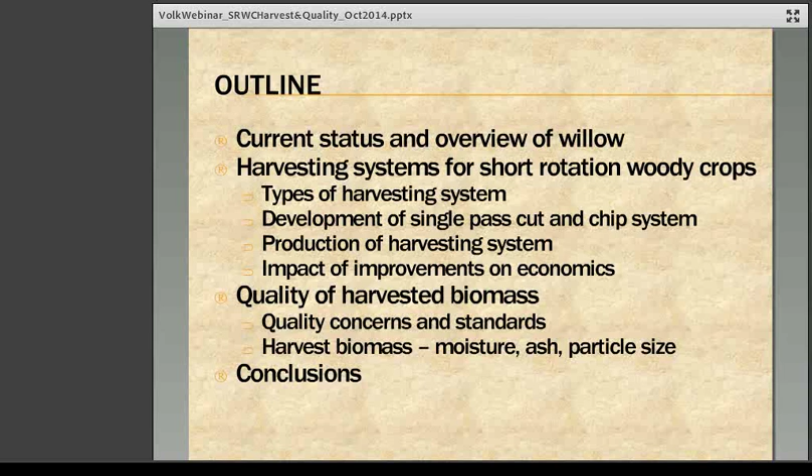Okay, so up front, just to acknowledge that funding over the last few years for work on willow harvesting and chip quality issues has come from a number of sources: Department of Energy, NYSERDA, NYSTAR, USDA, and the New Bio program as well. And there have been some key partners involved in this project over the last number of years. New Holland has been a key partner. It's really their harvesting system that we've been working with primarily over the last few years.

Greenwood Resources is out in the Pacific Northwest, and they grow hybrid poplar on about 30,000 acres out there. For some reason, Zeachem's label in the bottom left has disappeared, but they're the biorefinery that Greenwood is working with here, and we have worked with Applied Biorefinery Sciences. This is an organization here trying to develop biorefinery approaches here in the Northeast using woody biomass. Mesa Reduction and Engineering does a lot of work in the biomass realm in the Northeast and other parts of the country, particularly around pre-processing and logistics.

Okay, so just a couple of slides to sort of bring people up to speed on where things are at with willow deployment, particularly in relation to the USDA Biomass Crop Assistance Program. So this slide just shows you the 3 counties in northern New York where willow is currently deployed, and there's about 1,200 acres of willow under that program. As part of the New Bio program, there are willow trials in a number of other states and areas as well, but in terms of commercial scale-up production, this is where activity is currently focused.

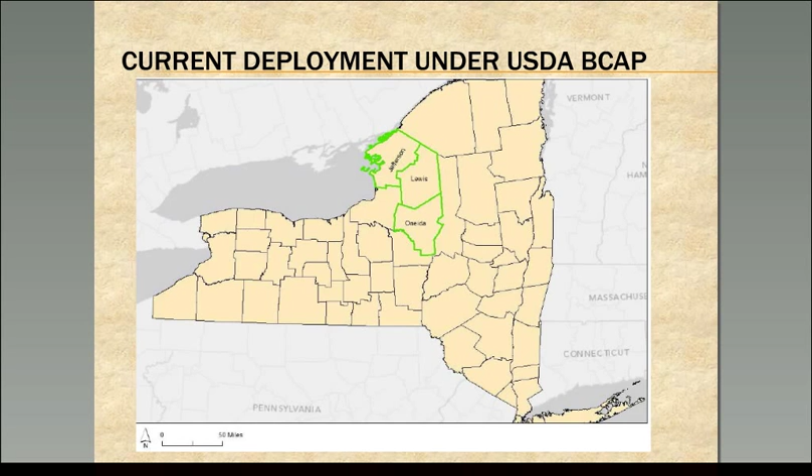This just shows you a little more detail what's going on in those counties with the green dots showing you where willow fields are located. And then the 2 outlets for this material are both owned by a company called ReEnergy. ReEnergy uses wood to produce renewable electricity and heat at these facilities. And they have signed agreements with all the landowners involved in the BCAP program to buy all the willow from these fields over the next 10 years.

So a recent development that was important and is important for both bioenergy and short rotation woody crops in this region is a long-term contract that was signed between the Defense Department and ReEnergy Black River. So just go back, that's this facility here, except for the arrow's not working. Oh, there it is. So this facility here, which is on the base, Fort Drum, they've just signed a 20-year agreement to provide renewable energy here to the Army

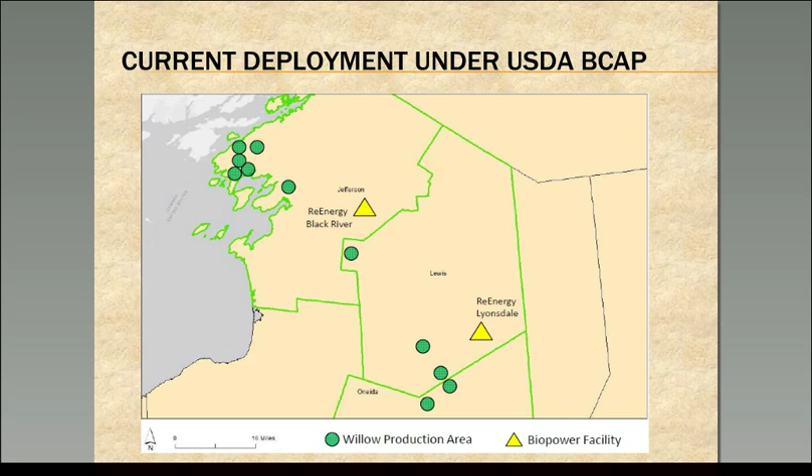in a contract arrangement. So that will provide some degree of certainty for the bioenergy market here in northern New York, and hopefully provide some opportunities to grow the bioenergy and short rotation woody crops market here in this region. So this is the largest renewable energy contract that the Army has signed to date, and they have a fairly aggressive program to get a significant portion of their power and energy supply from renewables in the near future.

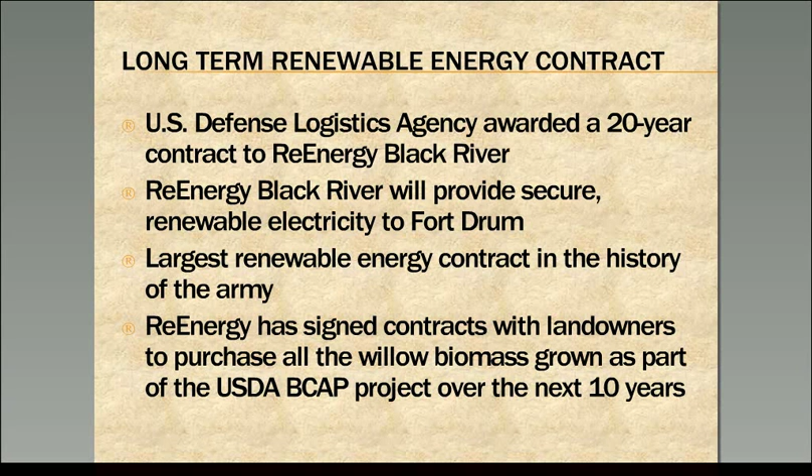Okay, so just to focus in on willow now a little more, and just to remind people, many people on here are probably familiar with this cropping cycle, but just to go over it again so we understand how the system is working. This is how the system generally works. We start with site preparation on open agricultural land. It's prepared and then planted using unrooted dormant cuttings.

Typically after the first year, it's coppiced or cut back. It sprouts back after that establishment year after being coppiced and grows back fairly rapidly, right? And then we typically go up here to a 3 or 4 year cycle, and it's time to harvest. Harvest is typically done in the late fall or winter.

The product is coming off here and then being delivered to end users, and the crop sprouts the following spring, grows for another 3 to 4 years, and then we have 7 of these crop cycles on the green arrows, and each time we're harvesting, we're pulling off biomass and selling it to an end user.

So that's the general process that we're looking at here in terms of how willow is being grown and being managed. And then today we're going to focus really in on this harvesting piece, what's happening with harvesting and the quality of the chips that are being produced from these harvests.

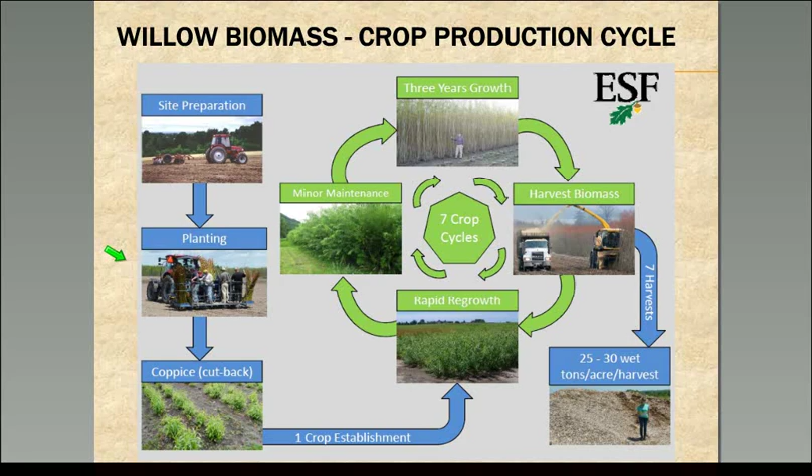So just a couple of quick notes on why the focus on harvesting has been fairly intense over a number of years now. It's really the single largest cost. So if you go back to this diagram and think about the fact that you have 7 of these cycles, which means this equipment, whatever is being used for the harvesting operation over the lifespan of this crop of 20 to 25 years, is being put on the ground 7 times, in contrast to, for example, planting, which is a one-time operation. So it's the largest single part of the final cost of willow biomass delivered to an end user.

Harvesting is also the second largest source of greenhouse gas emissions after nitrogen fertilizer additions in these systems. So it's important from a number of different perspectives, and something that requires attention and focus in order to make improvements on it.

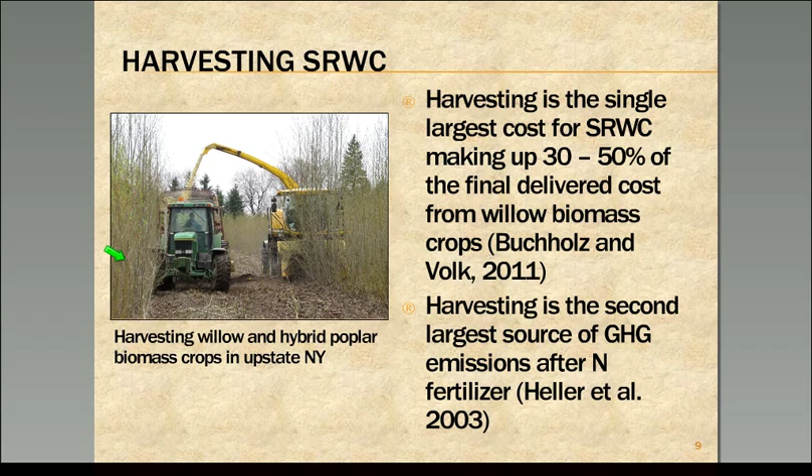There are multiple ways of approaching harvesting of short rotation woody crops, and there's been work done in other parts of North America and quite a bit of work done in Europe over the years. And so these are just some examples of other activities that are going on in relation to harvesting willow and other woody crops. There are whole stem harvesting systems.

So in the top right you can see a whole stem harvester with material that is just cut off and piled and then dropped on the ground and then moved to the edge of the roadside. So these pieces of equipment can generally handle larger stems. You've got some potential for natural drying of the material. However, you have additional handling steps involved in these kinds of processes.

Down at the bottom right, there's other folks that have worked on, instead of handling loose stems, which with willow can be a bit of a problem because of the way the material falls and can become intertwined, baling or bundling systems. So down on the bottom is a bio-baler that was developed by folks up in Quebec and has been used in a number of different locations. There's also a bundling machine that was developed in Europe.

Again, potential for natural drying, generally a little lower productivity, some benefits in terms of using these at smaller scale operations, and then just the realization that you have an extra handling step if you're going to get this material into a form that's usable by producers or end users of your product.

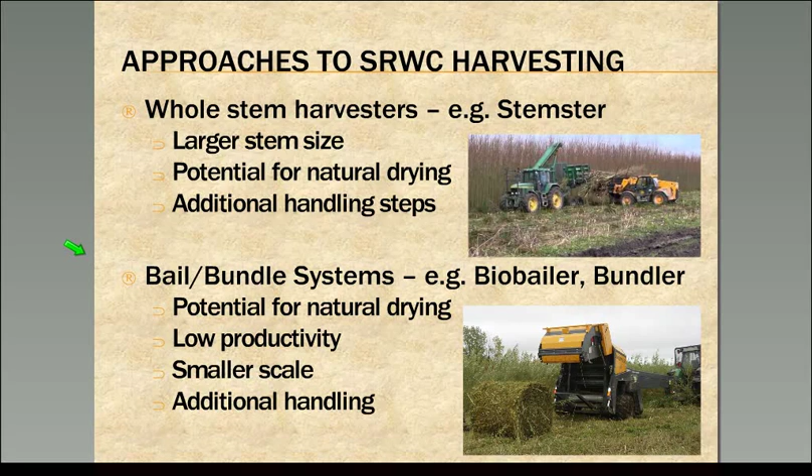NewBio will next year have one of these tractor-mounted corn chopper systems here and available for use, so that will provide some benefit for smaller scale trials in particular, and also help us to get a better handle on what costs are associated with running those operations.

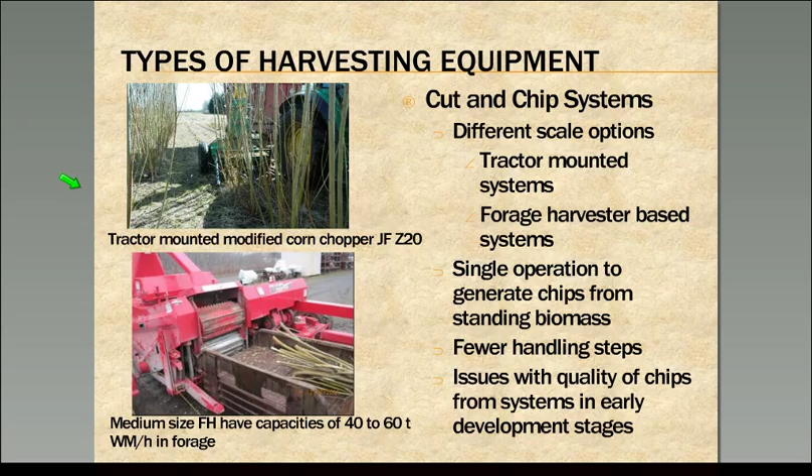So just to have a brief summary of what's gone on here in the U.S. in terms of trying to develop willow harvesters over the last number of years. Here is the type of system that was being looked at early on, and there were a number of challenges over these sort of development periods. You can see the quality of this material and these photos that came out of some of these early harvesters was not at all acceptable.

So in these pictures here, you can see that this is not material that most end users are going to be excited about getting at their facility. It's going to cause lots of problems with handling and delivery. There were problems with equipment reliability, high costs, and the size of stems that could be cut and processed with some of this early equipment were also issues.

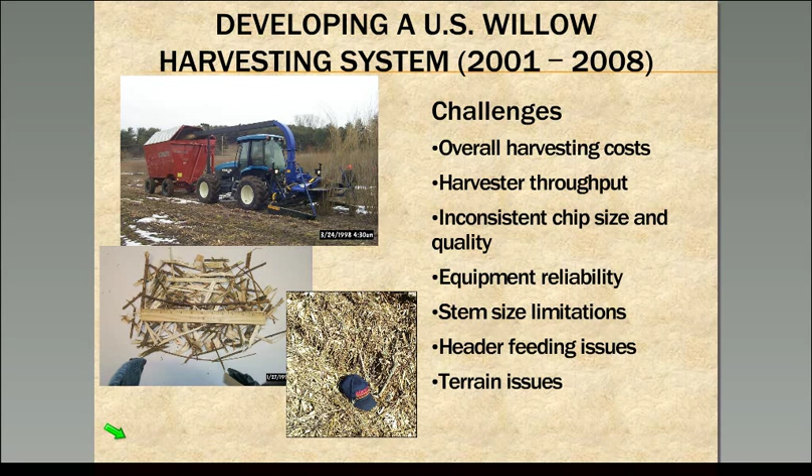So that machine is the same as this one. It's called a bender. This is a tractor-mounted machine that we worked with for a number of years. It came out of Europe, out of Sweden, and some companies that were developing it there. We worked with Cornell University for a number of years to try and get that to function effectively here, and it never really did, never was reliable or produced consistent quality chips.

The next step was actually New Holland contacted us and wanted to see if their forage chopper could operate in willow, and they brought a modified corn head up, and we put that through some willow and thoroughly ruined it within a few acres, but it did show the folks at New Holland that their forage chopper with no modifications on the inside could take in willow and produce a nice product.

The next stage in the process was to adapt this very heavy duty header from a design in the UK. It was modified and redesigned slightly to fit on a New Holland machine. And that worked for a number of years. It had some issues with feeding, but was a significant improvement.

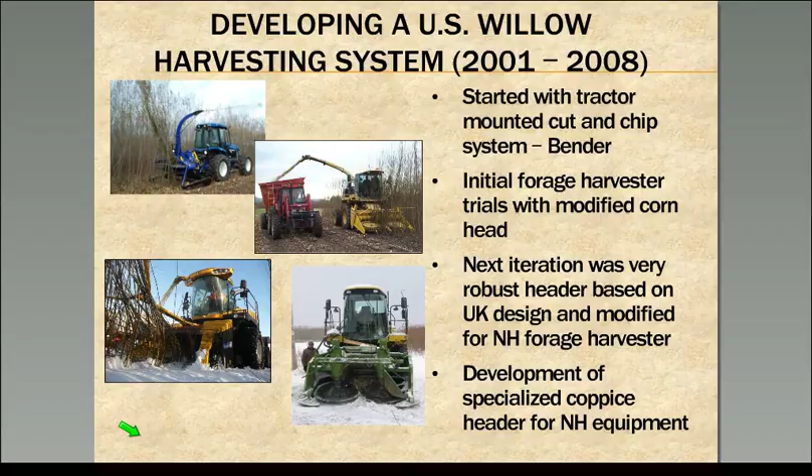Okay, so this is just to give you a little bit of idea about the harvesting equipment used in this project. Again, it's based on the New Holland forage choppers. So this back part of the machine, the forage chopper behind the header, there's nothing dramatically changed in this. There are some extra guards you want to put around the window, and they put a guard underneath so that lines and things don't get caught when you're cutting woody crops. But other than that, there's no significant changes to this machine.

This header then fits on the front, and you can interchange and use your forage harvester for other operations, as you can see in the bottom, for either corn or grass or other operations like that. So one of the advantages of this kind of a system is that farmers can use it to harvest more traditional crops, change the head, and then harvest woody crops after the typical crop harvesting season is over.

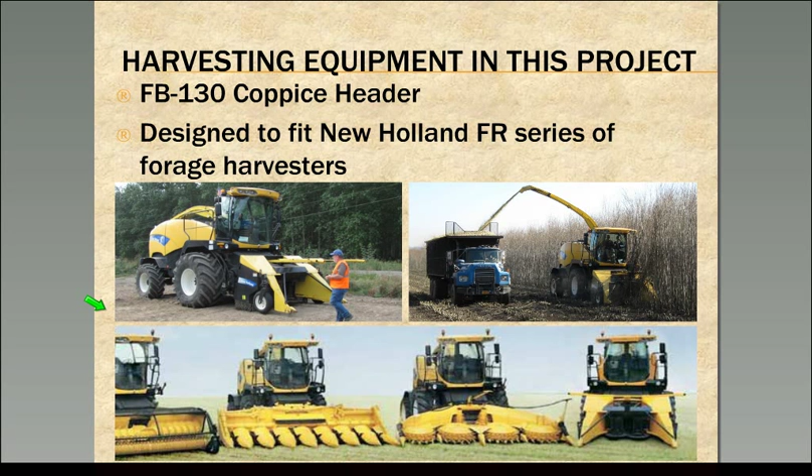Over a number of years, we worked in conjunction with New Holland on the development of this machine. New Holland really did the work on designing the cutting head and any other modifications to the harvesting system per se. There was lots of work done on components. This is a picture that shows the front with the saw blades at the front into the feed rollers here. They did work on these vertical rollers, how to collect material, how to get it to move in smoothly into the harvester.

There was a fair amount of work done on this push bar that sits out in front of the machine. It's the first thing that comes in contact with the willow, and the angle of that and the strength of that is important. A lot of work on saw blades in terms of what is the optimum type of saw blade for cutting effectively and efficiently without having huge maintenance costs incurred in the process.

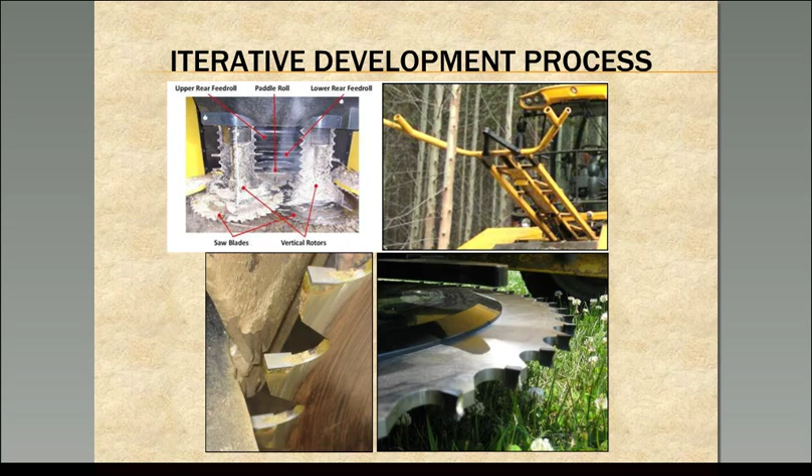So what really happened here is New Holland folks would make modifications and improvements. We'd go out in the field and do testing, and we do monitoring around those operations. They'd learn lessons and go back and make changes and improvements, and it was an iterative process over a number of years to get to the stage of where things are at now. So we're going to show you a short little harvesting video here to give you an idea of what this looks like when it's running in the field.

So this was part of harvesting operations that occurred in 2012 and 2013 in central New York. So this is a shot from inside the cab.

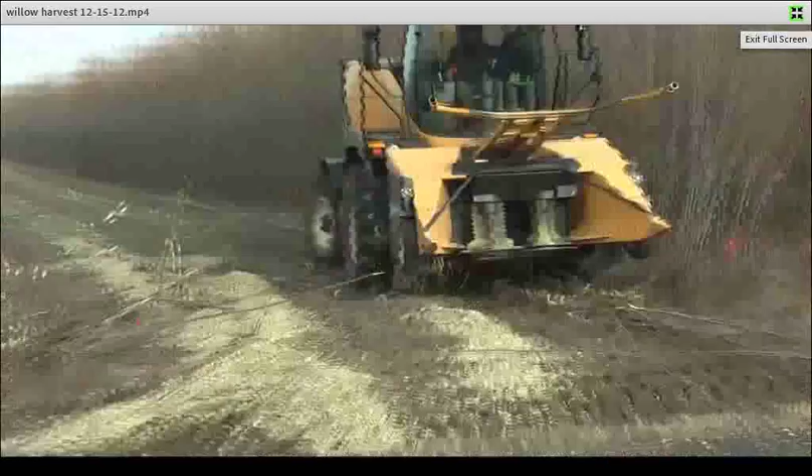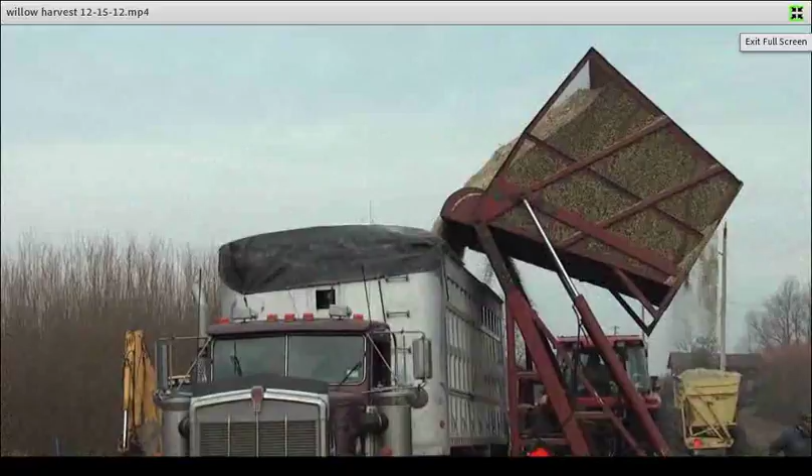So again, this is a single pass cut and chip system, so it's cutting off the willow. The stems are fed through the forage harvester, and it blows out chips into a collection wagon. We looked at a number of different collection wagons in this process. The one going across the screen is actually used in green bean harvest in upstate New York, a self-propelled wagon.

This red wagon that you've seen in a couple of shots is actually a sugarcane wagon, so it was brought up from down south. It fits well into the spacing that we have for willow, and the other advantage is that it lifts higher than most of the forage dump wagons that are used in the dairy industry around here, and so you can dump directly into trucks such as you can see here. Okay, so that just gives you a little idea of the operation of the machine.

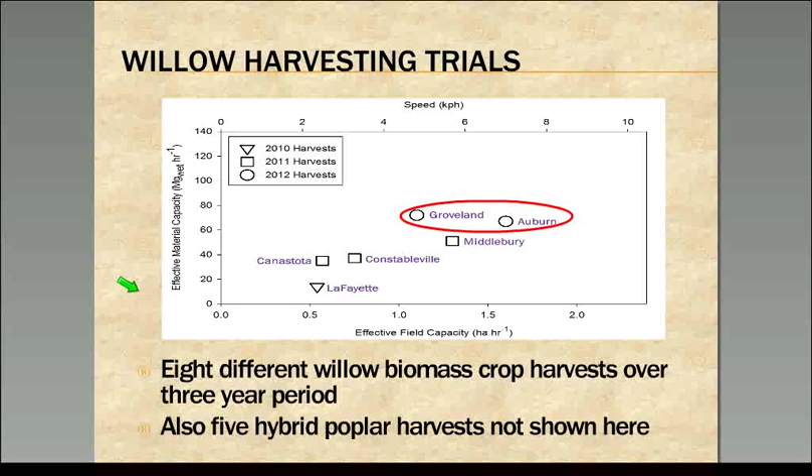When we talk about economics, we set up this base case, and this was a trial down here at Lafayette that was done in 2010. So when we come back to the economics and we talk about the base case, we use data that was collected from the harvesting back here in 2010 to indicate what the costs were associated with the machine at that point in time, and then to look at improvements that occurred over the 3-year period of this project. So let's move on, and we'll talk about what results were found from these Groveland and Auburn harvests.

So just to give you a snapshot of these sites, there was a collection of fields here and one smaller one, and this material was delivered over here into Auburn onto a hard pad. Here at Groveland, the fields were here, another set of fields here, and then they were delivered down here to a nearby farm and put into short-term storage. Again, about 150 acres were harvested in 2012 and 2013.

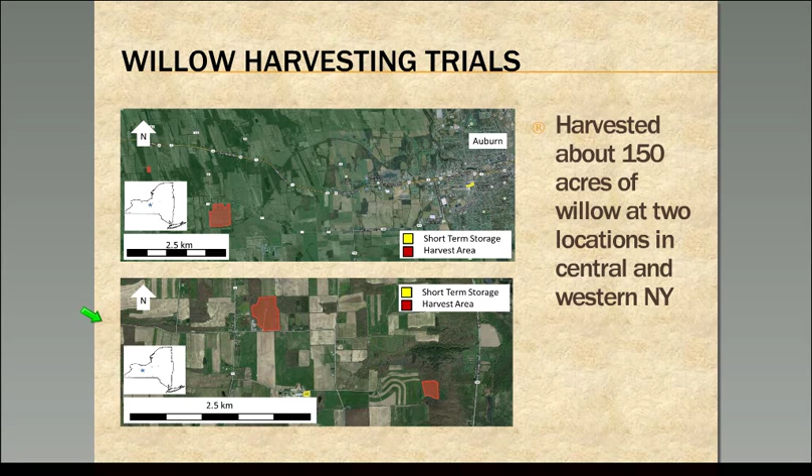So I don't want to get into all the details of this, but there was a lot of data collected, well over 1 million GPS data points. We had GPS equipment on the harvester and on the tractors that were hauling wagons or trucks that were collecting chips, and so we put all that information together, and Mark did an incredible job of processing all that information and making sense out of it, and I'll show you summary results from lots and lots of work to get that done.

But again, the main things we're looking at here are ground speed, that's called effective field capacity, so how many hectares per hour. We have records now of standing biomass, wet tons per hectare, and then we have effective material capacity. You can think of that as throughput, how many megagrams wet per hour are coming out of the harvester. As a result of the work that was done and the monitoring that was done, we also have information on turn times and delay times and other information like that that we won't necessarily get into today.

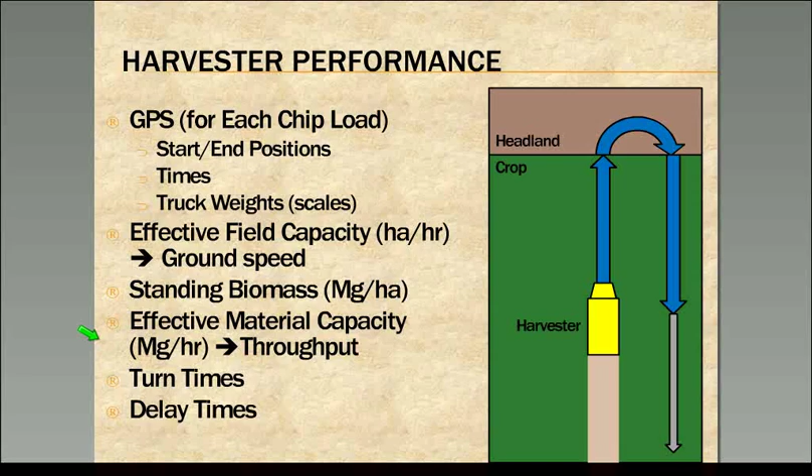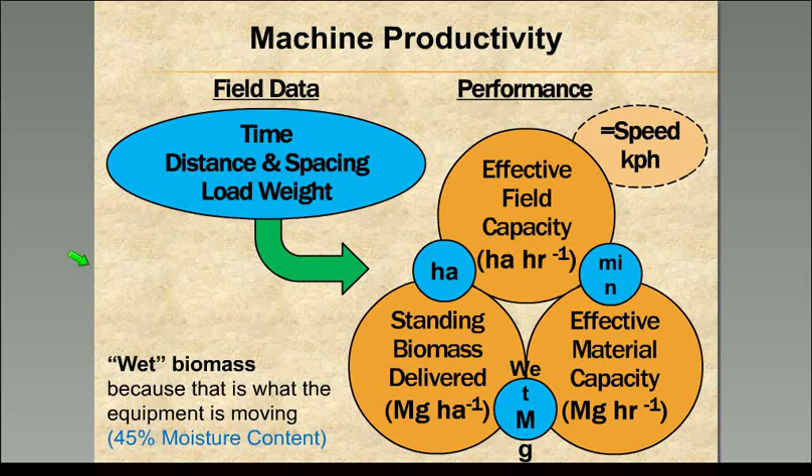So again, these different components are linked, right? Effective field capacity, hectares per hour, standing biomass, and effective material capacity are related to one another, and all information that we collected and processed out of these harvesting operations or trials. Okay, so we could spend a lot of time talking about that process, but really this is the key summary graph. So what do we have here?

We have standing biomass in terms of what was delivered. So this standing biomass number does reflect what came off the field and what was delivered to the scales at short-term storage. Again, we're doing this in wet tons because that's the way it's coming off the field, so wet tons per hectare. And on the y-axis, we have effective material capacity or throughput. How many wet tons of biomass are coming out of the machine per hour?

And what we really found is that there's two different patterns in this relationship. When you're below about 45 wet tons per hectare, there's a relationship between standing biomass and throughput. And so this is really limited by the speed that the equipment can go across the field. And so you end up developing this relationship.

When you get above this about 45 wet tons per hectare mark, then the output of the harvester actually begins to level off or have a much smaller increase as the standing biomass increases. And so what you're really starting to reach is the capacity of the machine, and it becomes more limited by the vegetation and the amount of biomass that you actually have standing on the site.

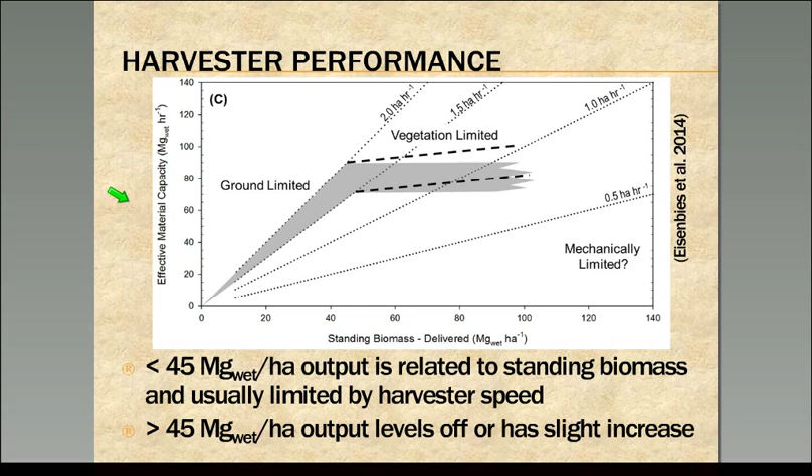Okay, so this is from 150 acres of willow harvest, right? So this graph in the bottom is the one I just showed you in more detail on the previous slide. One of the things that is clear is that this slope can change. So this part of the graph here can flex up and down, as well as the height of where this levels off in terms of the throughput of the machine. So this part of the graph also has the potential to slide up and down.

So it's factors like the operator in the machine, the capacity of the machine, improvements to the machine, the type of ground conditions that you're dealing with that may well change the dynamics or the exact location or slopes and angles of these fields. So as more data is collected, we'll have a better idea of refining that. We've already seen some shifts in some hybrid poplar plantings where this bar here tends to be shifted a little bit to the left because of the ground conditions and the type of crop conditions they're dealing with in those harvests.

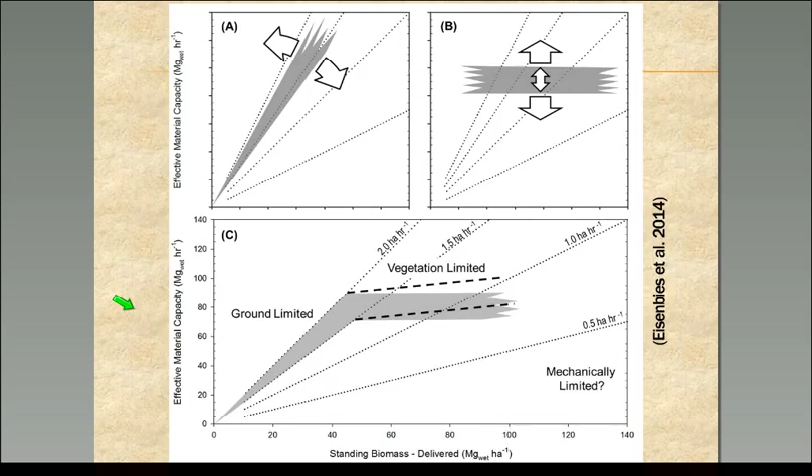We also did some work to look at the system, and as we mentioned before when we were looking at the video, there were a number of different harvesting collection vehicles that we looked at. The two that were probably the most effective were this cane wagon, and landowners are now using these for harvesting in northern New York. And on one of the fields, the conditions were dry enough that we were able to put silage trucks directly into the field.

So these are the kind of trucks that people also use when they're harvesting corn silage if ground conditions allow, and the spacing in the willow field actually allowed these trucks to go into the field for the most part, and we could collect directly into these trucks, and then those trucks could go off directly to short-term storage. So you skip a step, because if you collect in these cane wagons or some of these other wagons, you then need to unload into these silage trucks, which were taking the material to short-term storage.

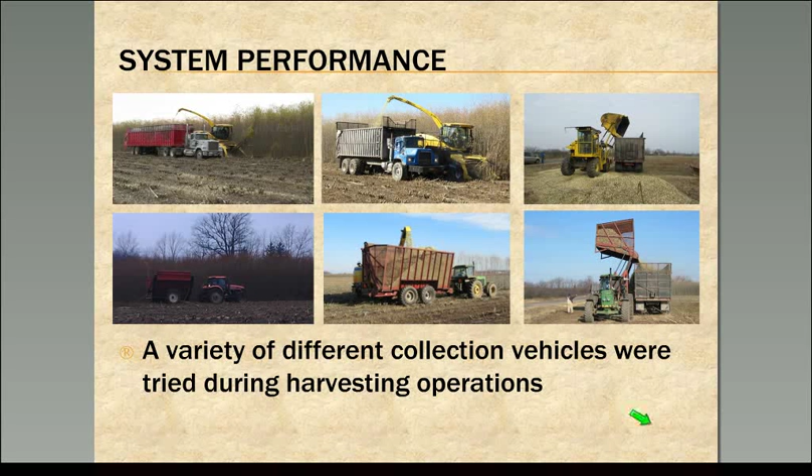And we can tell you that the headlands in these trials were wholly inadequate. 10 to 15 feet to turn around this kind of equipment at the end of a row is wholly inadequate. And I think people have learned lessons, at least the people involved in these trials have learned lessons that bigger headlands has got some real value when you get to harvesting. And then what happens when you get it to the landing and move it into vehicles and deliver it to short-term storage. Okay, so those are all the steps in the process here that we have information for.

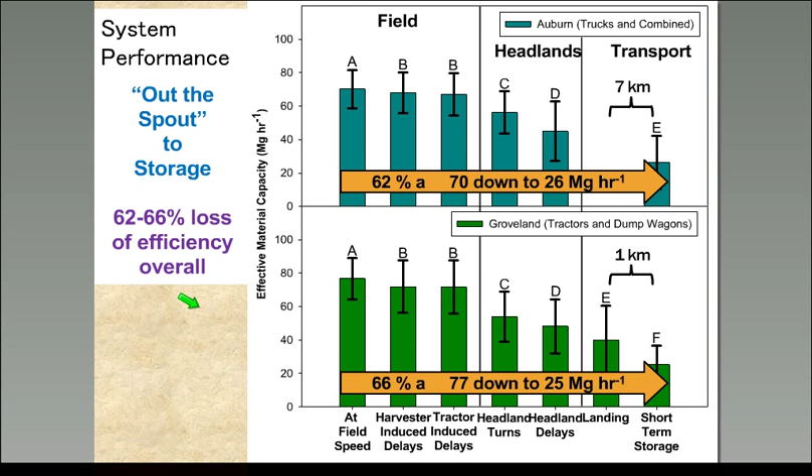Okay, so just in terms of the efficiency, when you look at what's going on here in the field, at Auburn, over 90% of the runs that were recorded with data were over 85% efficient, and in Groveland it was slightly under 90%. But generally over 85% efficient in terms of operations in the field. So not a lot of downtime associated with either the harvester or tractor-induced delays at that point in the system.

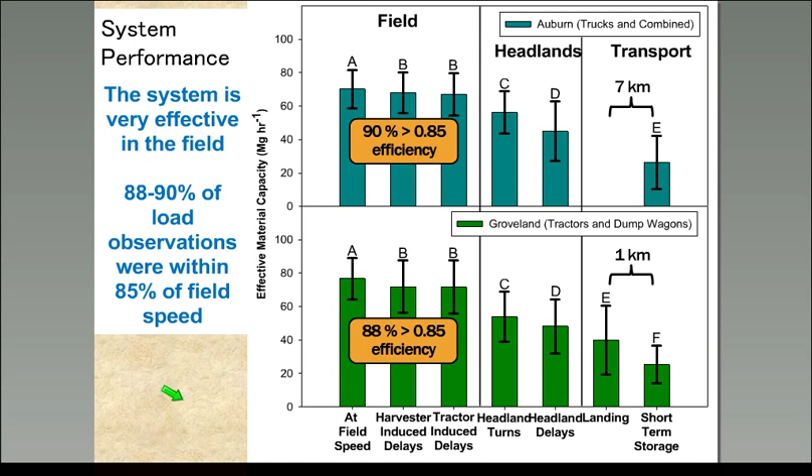When you add these other components in, very few of the runs, about 10 to 14% of the runs, had greater than 85% efficiency. So this really just to emphasize that it's these parts, including the headlands and getting the material off the field and delivered to short-term storage or an end user, is where the gains are to be made, and work needs to be done to make improvements.

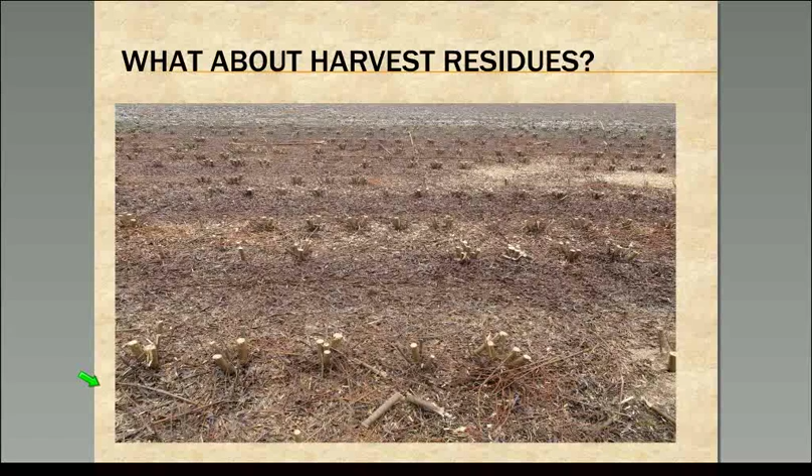Okay, so just a comment about harvest residues. People often wonder what's getting left behind, and this picture sort of captures the components. There are pieces of stem that sometimes don't get picked up by the harvester. There are collections of stems that are sometimes pulled along with the harvester and dropped in the field. There is lots of fine and small material that is also left behind. And sometimes there are pieces of stems that don't get cut off and are left on the stool, not illustrated so well here in this picture.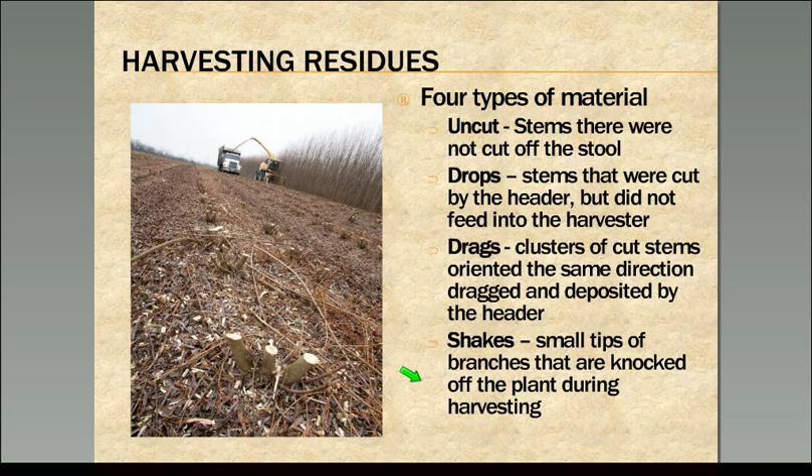So how much stuff is left behind? About 6 to 8% of the standing biomass from the data that we collected out on these harvested fields seems to be left behind, and about half of that is this shakes material that I was mentioning. So it's this small tips and fine branches of the willow that is being left behind.

And when you start looking at that material, it's probably a good idea or an acceptable idea that that material is getting left behind. It generally is harder to chip that material and get it to a consistent size, and so it often can cause some problems with handling systems. It's also got a higher nutrient content, and so leaving some of that material back behind on the field also has the potential to address some of the concerns that get expressed sometimes with nutrient removal.

So really, what are you looking at then? Maybe 3 to 4% of the standing biomass gets left behind in larger pieces of material that would otherwise be nice to be able to collect. So a relatively small amount of material being left behind in these harvesting operations.

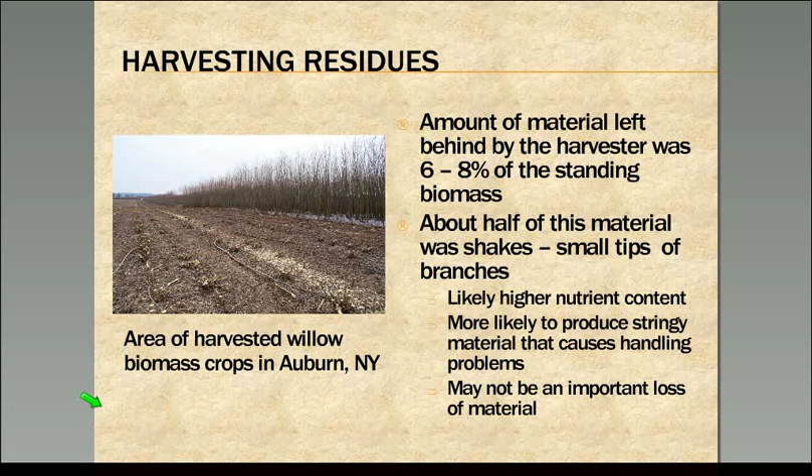Okay, so let's talk about economics for a minute in terms of this harvesting system. And again, I'm going to go back to what I mentioned before. When we were doing this work, we were required to develop this base case scenario. So in 2010, we went out and did some measurements during a willow harvesting operation. And the data that was collected at that point in time with the state of the harvester as it was and being operated is our base case scenario.

It was also a slightly different collection system than what we're using now. So it had a forage harvester. Chips went into a small dump wagon that was pulled by a tractor. That small dump wagon was then unloaded into a blower, a forage blower, and those chips were then blown into a chip trailer.

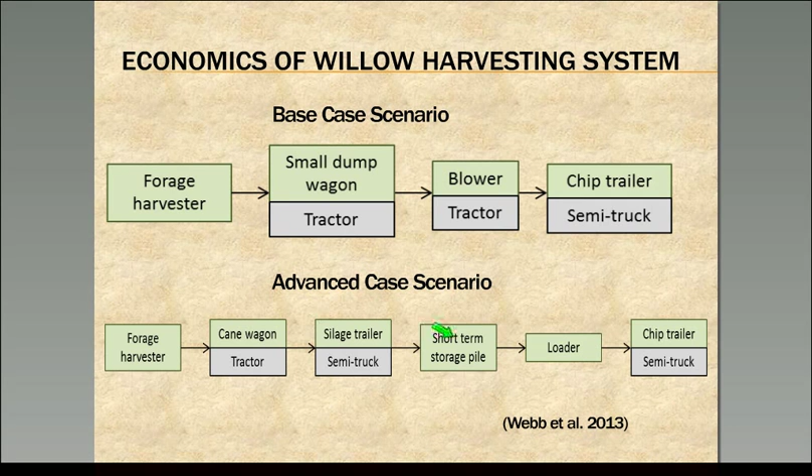The advanced case scenario is the other one that we'll look at in contrast. So this is based on the harvesting data that I've been talking about from 2012, 2013. It's got a forage harvester. It's got this cane wagon that I've shown you pulled by a tractor into a silage truck, which is delivered to short-term pile. It's then reloaded and put into a chip trailer and delivered to an end user.

Okay, so just some comments on this. We collected data in the field and then provided it to folks at Oak Ridge National Lab, and they ran it in their IBSAL model, and it was based on our 800,000 dry ton per year biorefinery operation in upstate New York.

The willow was harvested from October to early April, and so that means that about half of the year's supply, 400,000 dry tons, was coming from willow. The other half of the material was going to come from forest residues in this scenario. When they looked at land availability and where willow could be sourced, it had a radius of about 28 miles around the facility in order to reach that target of supplying 400,000 dry tons per year.

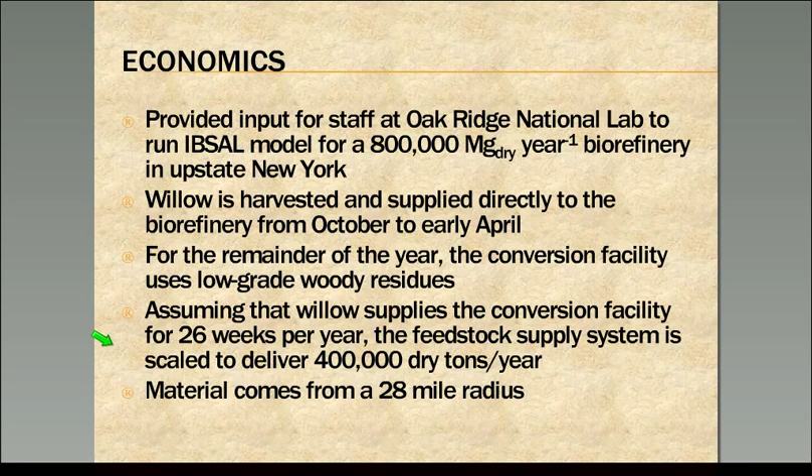Okay, just some other comments on these things. So again, this base case is based on field data that we collected in 2010. The harvester efficiency was fairly low. It was only 74% efficient, and its speed was lower than what we've had in the last couple of years, about 1.5 miles per hour. And I talked to you that this blower was being used instead of going directly into silage trucks to short-term storage.

In contrast, you can see at the advanced case, so 3 years later, considerable improvements in harvester efficiency and speed. And so these really reflect the iterative process that went on over a number of years and improvements in the harvester operation.

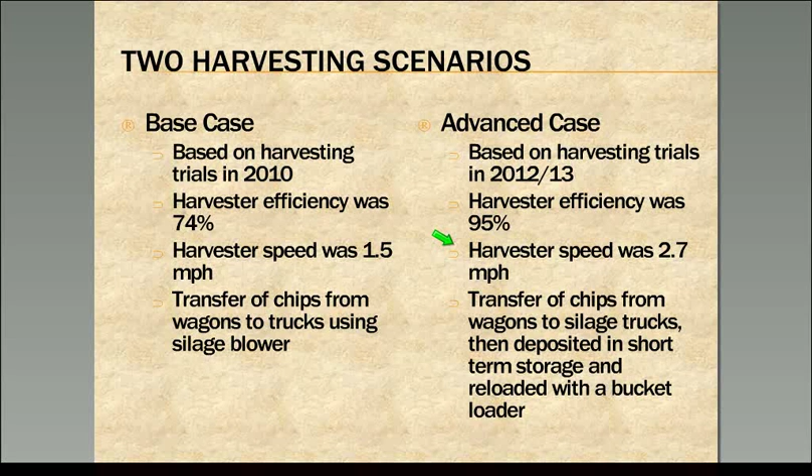Okay, so here's the results. These numbers are reported in terms of dollars per dry ton. If you just want the bottom line, here it is. In the base case scenario, costs were around $52 for the harvesting and logistics part of the system, $52 per dry ton. In the advanced case scenario, it's down around $34 per dry ton. So about a 35% reduction as the harvesting system was improved.

And you can see where the main improvements are. Had to do with the operation of the harvester, an improved operation, better efficiency, better throughput.

So that has a big impact on the costs of the harvester, and then also it has an impact on in-field transport, because if you're able to move this harvester more efficiently with less downtime, you have a lot less downtime and sitting around with collection vehicles and extra costs associated with that when things are not being productive.

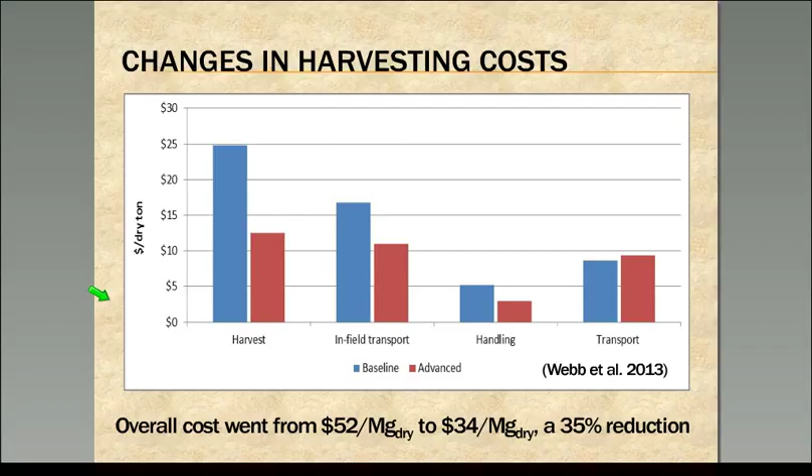A little bit different in handling, and part of this is probably related to the changes in the handling system that were involved there. That forage blower, although a nice idea and at a small scale might be beneficial, is a slower process than the other one that was used later on. So that's the sort of improvements that were made as the harvester was improved over the last several years when looked at in a scenario for a large-scale biorefinery. So that's not what everybody wants to look at.

If you want to look at harvesting costs on a smaller scale, so as a producer or somebody who's managing a few hundred or a couple thousand acres, what are the costs going to be? And this is the model, a cash flow model that we've developed here at ESF. And Justin Heavey has done a lot of work in the last few months to really dramatically improve this. We've just released version 2, and we'll be doing a webinar on this in more detail later.

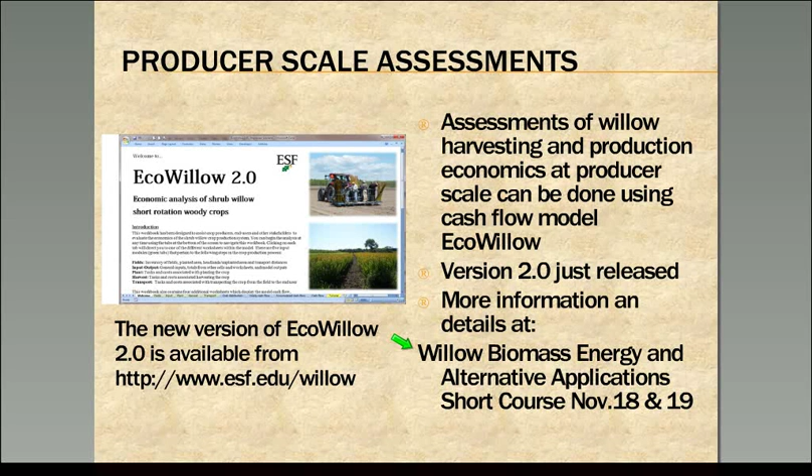But if you really wanted to look at producer scale type assessments of willow costs, including harvesting, this is probably a better model to use as opposed to that large scale logistics model, which is really looking at it from a biorefinery point of view. But I'll leave detailed discussions of that. You can either join us here at this short course on November 18th or 19th, or we'll be doing a webinar to walk through the updates and improvements to EcoWillow 2 as a new bio webinar in February.

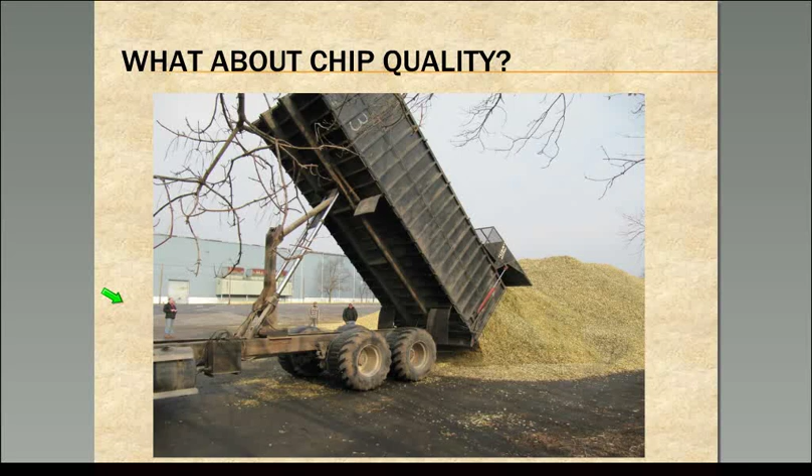Okay, so the last thing I just wanted to touch on then is what about chip quality? So here's a picture of chips being unloaded at the Auburn harvest. So where are we at in terms of chip quality and concerns about that? This is an important piece to spend some time thinking about and focusing on, because if we can harvest material off but it doesn't have the quality that end users want, then it's not got the value that is needed to make the system work.

There's been a lot of focus in the past on just driving down the cost per ton and not being concerned about the quality of the material, but if you have low cost material that's low quality, it's not going to work in the system very well. The other thing that has come to light fairly clearly in the last few years is that there's real differences in the quality of hand-harvested, research trial, pristine material versus field-harvested large-scale types of harvesting of material. One of the biggest items that is noted in that is increased variability when you go to large-scale harvesting.

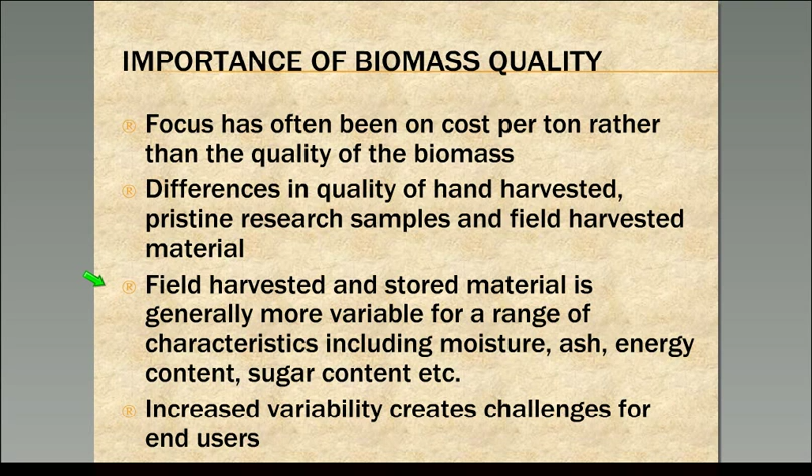And Kevin Kenney and others wrote a paper in 2013 that showed this fairly dramatically. And here's a graph that shows you ash content for corn, miscanthus, and wheat. And so you can see, for example, here's corn stover, and people often talk about corn stover having a 7 or 8% ash content, and that's certainly what looks like the majority of the samples are here. But then you look at this and you realize they are getting in a significant number of samples that are over 10%, and then even samples out here that are above 39% ash content.

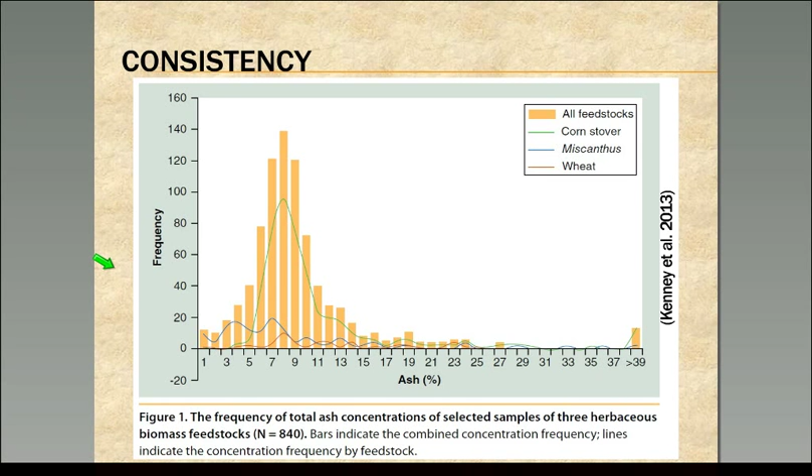So as an end user trying to build a facility to run on a source of feedstock, this kind of uncertainty of what the quality of the material is going to be causes a lot of problems. And if you've designed your system to run on 7 to 9% ash content of the material coming in, and you get truckloads of material that's 20 or 25% or more ash content, it's going to cause a number of problems, both in the efficiency of the operation and how the system is going to run, as well as wear and tear. So when you go to large-scale harvesting, this is one of the big issues, the increase in the variability. So we took that idea and looked at it, and we'll show you those results in a minute.

The other thing that is out that I think is important when we talk about quality of material is these standards. So the ISO 17225 standards have come out for solid biomass. They have them for any number of types of solid biomass, pellets, and the one here that I'm showing you is focused on wood chips. So that's the one that we have keyed in on when we compare willow. Does it fit the quality standards that have been outlined in these ISO standards? And these ISO standards are really largely based on work that was done in Europe over a number of years, but now have been adopted by the International Standard Organization.

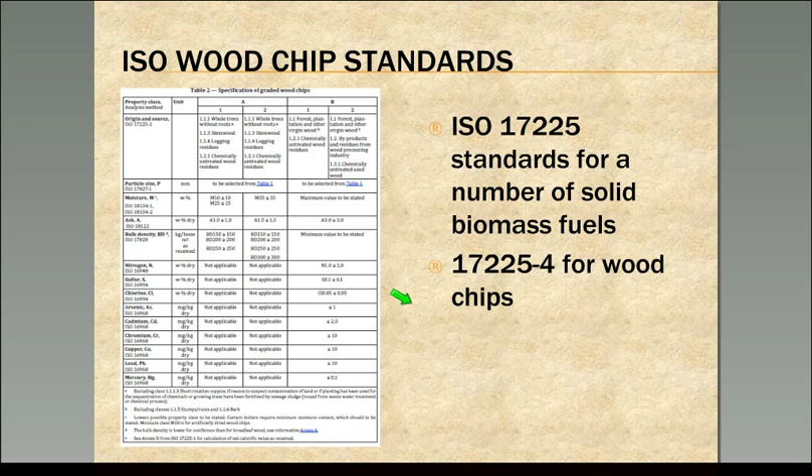Okay, so I don't expect you to read this, but this is just an idea of what the main table is in the ISO standards for wood chips. We're just going to focus in on a few of these parameters: moisture, ash content, energy content, and particle size distribution.

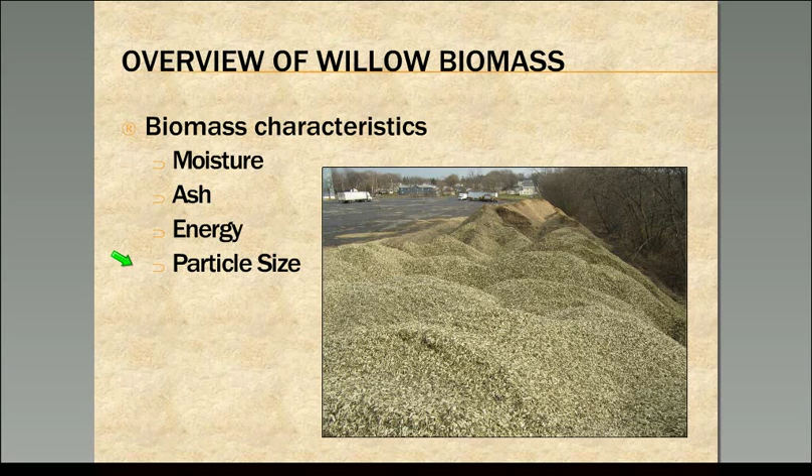So there have been a lot of concerns about this in the past related to Willow. There's some misunderstanding about these components, particularly moisture and ash content with Willow. Particle size has been an issue I showed you early on. Some of the early harvesting systems had real problems producing consistent size chips, and surprisingly, those impressions have lingered for years and years.

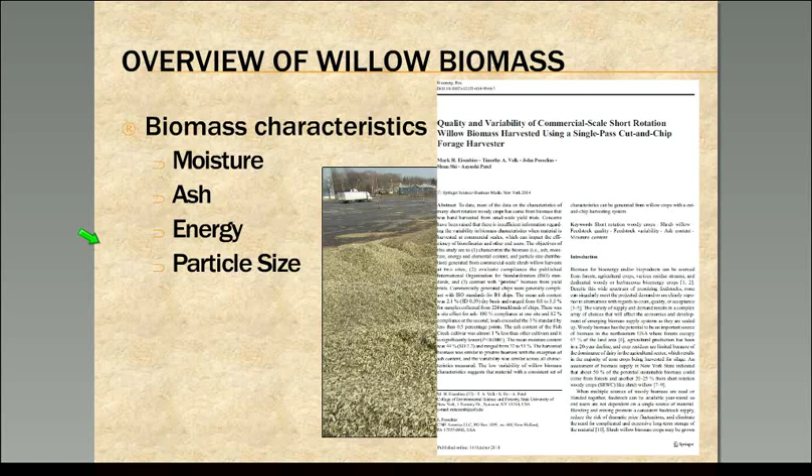This is a paper that actually just was released this morning that has this data in it in more detail. So on Bioenergy Research, if you're interested in looking at it in more detail, it's now available online with the data in it and summarized. I'll give you the key messages here.

What we have here is moisture content. And we have two things. We have pristine samples, so we actually looked at samples from hand-harvested yield trials at 2 locations in central New York. That's what the black bars are.

And here's mechanical harvested. So this is moisture contents from samples that were collected off the back of trucks when the material was deposited in them and delivered to short-term storage from the harvest at the 2 sites in Auburn and Groveland. So you can see there is some distribution and variation here, and that's important to note and be aware of. The mechanical mean was a little lower than the pristine mean.

This is often the range that gets reported for Willow biomass. People often report 50 to 55% in the literature. Certainly in terms of mechanical harvesting, that's not the kind of moisture content that's coming off of these fields. There are some other factors related potentially to weather, but likely as you harvest the material and chip it and blow it through this machine, there may be some initial drop in moisture that's occurring in the mechanical harvesting operation.

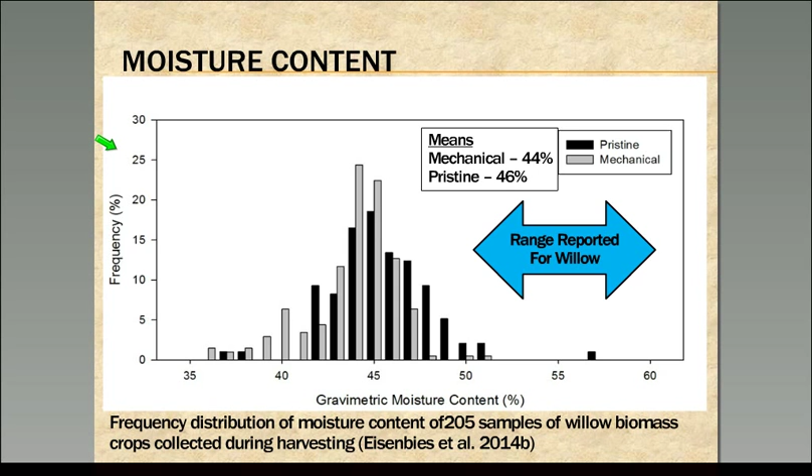So I should just comment, there is no ISO standard for the type of chips that we were working with. They're Class B chips because of the fact that they're coming from short rotation coppice. So in the ISO standard, you're just required to report what your mean and maximum moisture content is.

The ISO standard for Class B wood chips is 3%, so there was a small proportion of samples that exceeded that 3% level here, but it was a very small proportion, and there were no samples that exceeded 3.5% in the harvesting operations that we did.

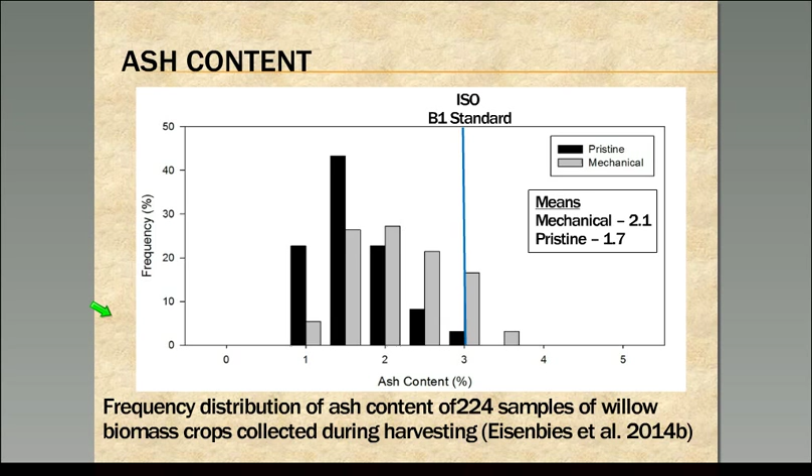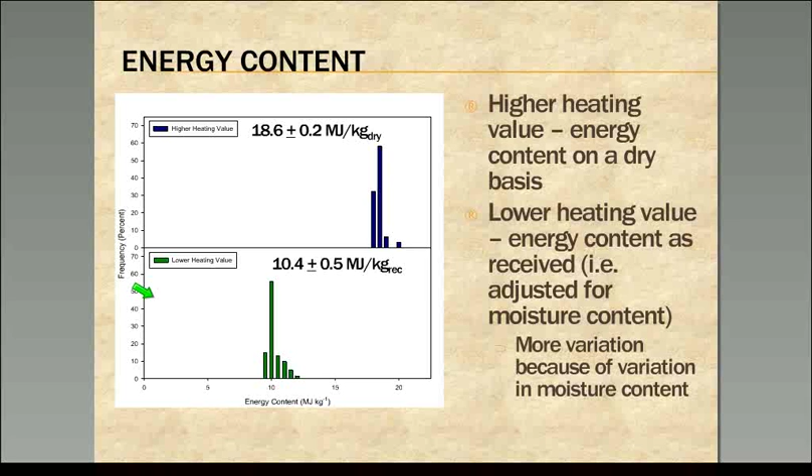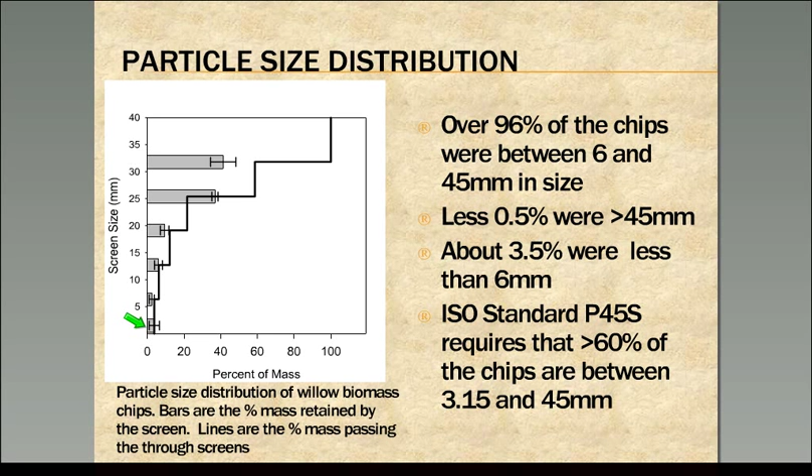So very consistent material. And in addition to doing this analysis, we had our partners look at it and sent samples to a number of other end users, and when all of them looked at it, the comments back were that this was quality material that they would be happy to be getting at their facilities and would be able to work with.

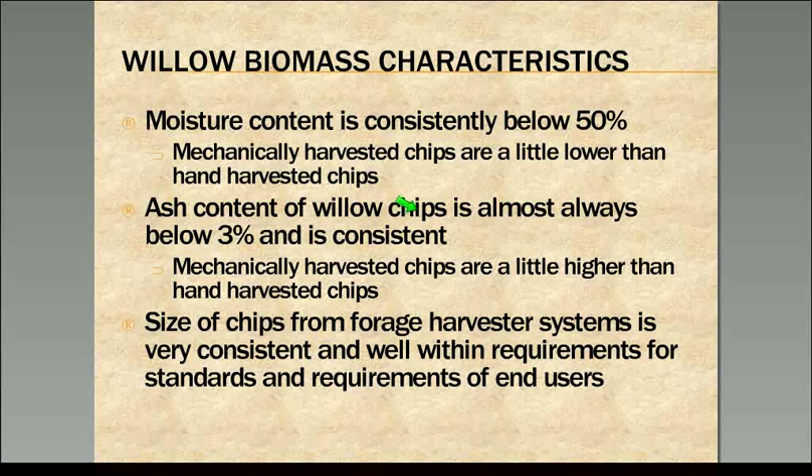Okay, so that's sort of a summary of the willow biomass quality characteristics that we looked at. Moisture below 50%, ash content is almost always below 3%, and size of chips is very consistent coming out of this forage harvester.